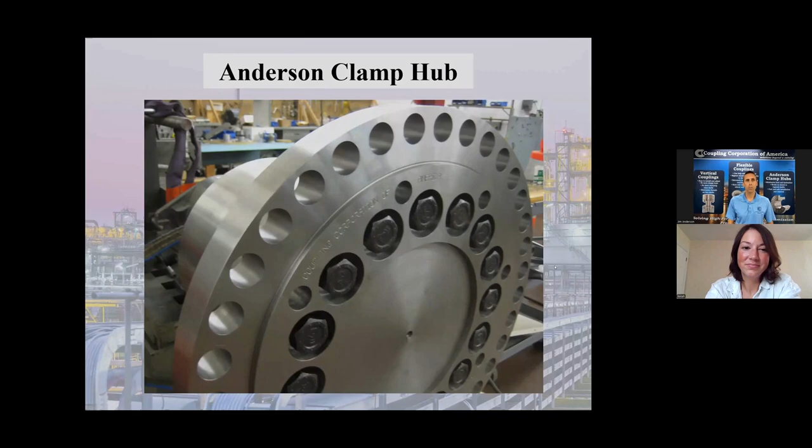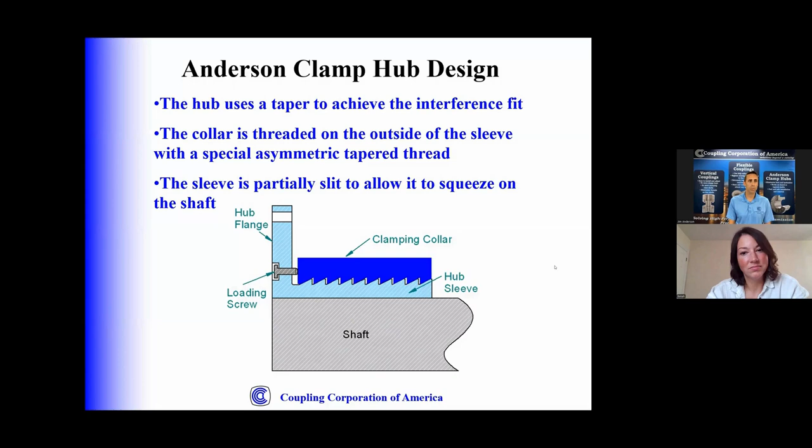And a lot of people love it because it's a mechanical shrink fit device that grips onto the shaft using friction. So this is a quick example, just a little diagram, and you can see there's a hub with a flange, and then there's a collar that screws onto it, and then a set of loading screws. As you tighten those loading screws, it pushes the collar. In this case, it pushes it to the right.

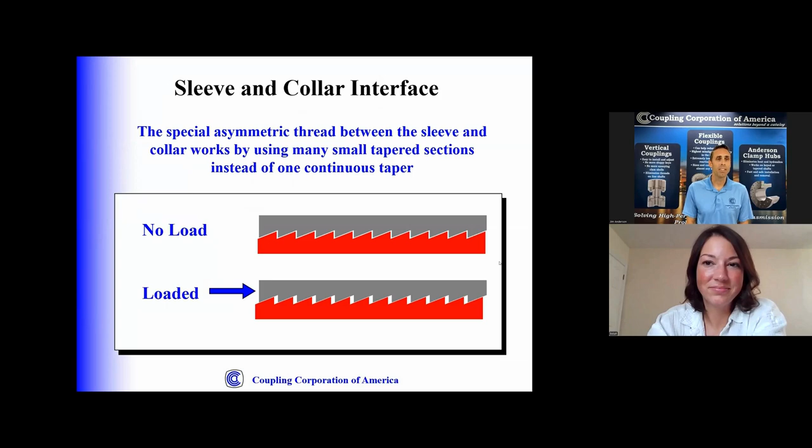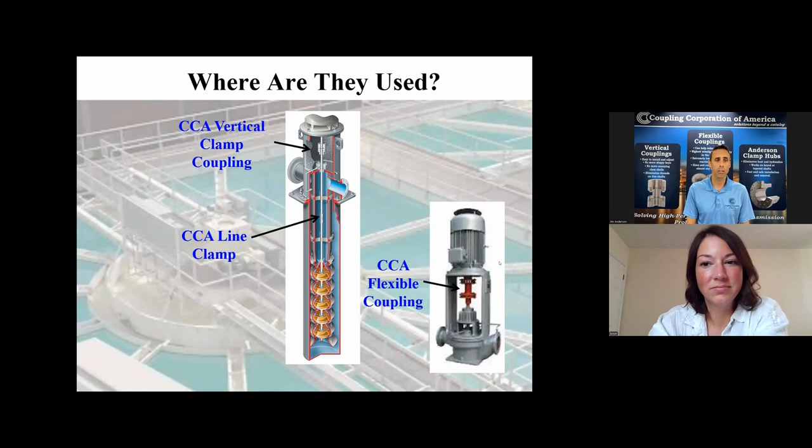We've got a product that works on line shafts. So if you have a deep well or some kind of long section type pump with stages of shafting, that would be the appropriate product there. And then we also still make flexible couplings that in some cases will be used on a vertical application, depending where the bearings are in the application. So today we'll talk mainly about the two rigid options, just how they work, how they fit in.

So this is the line clamp coupling, and as I mentioned, this all comes from our Anderson clamp hub technology, same type of technology, but it's been modified to use in this application. So what's really neat about it is it's designed to work on smooth shafts. So right now, a lot of people use threaded shafts. They'll have a shaft with a thread on one end, thread on the other end, and then they get threaded together with a threaded coupling.

And this allows you to get away from those threads. Just use a straight, smooth shaft, and the hub clamps onto both the top shaft and the bottom shaft. And this makes it a lot better for a couple different reasons, but it does make it a lot easier to make modifications in the field. It also works in both directions, which is great because a lot of times with threaded couplings, if you happen to spin the motor the wrong way in testing, you'll push it apart and end up breaking something in the system.

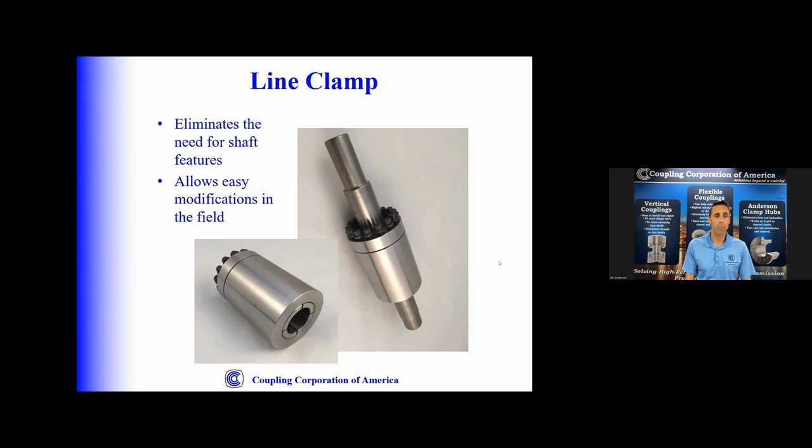But what happens is you squeeze the top shaft and the bottom shaft at the same time, and now you've got a nice rigid coupling. And this is designed to work usually in the water flow of the pump, so it's got to be a low diameter.

And the nice thing is when you look at a lot of applications where you submerge this pump shaft and you come back 2 years later, 4 years later, and try to get it apart, many people will tell you it's impossible to get my threaded stainless steel couplings apart. This helps to eliminate that problem by clamping onto the shafts. You're not getting all of the galling and the corrosion that would happen inside a thread.

So it releases much easier, and hopefully you can then save your shafts, use them again, not have to worry about replacing shafts all the time. And as I mentioned, it does it bidirectionally. So if you do happen to hook up the motor the wrong way, you're not just pushing the two ends apart and blowing out something at the top or the bottom of your system.

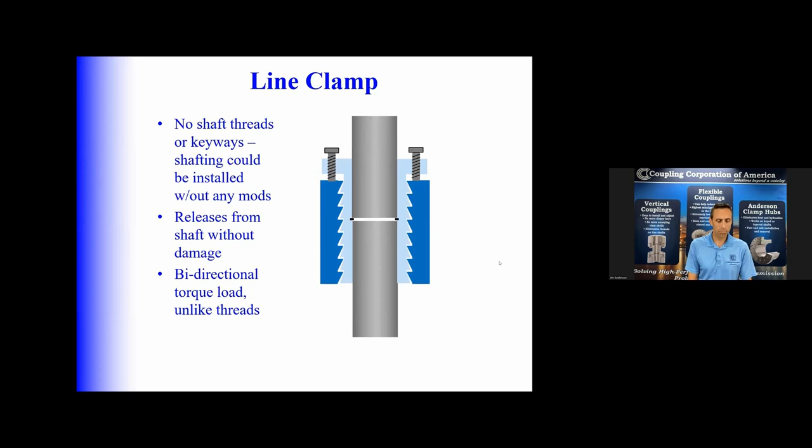So it's a neat product. This is all stainless in this case because it's underwater, submerged for years. In this case, we have a double-ended action. So we have loading screws at each end, and that just helps to provide a very large safety factor, just to make sure there are no problems.

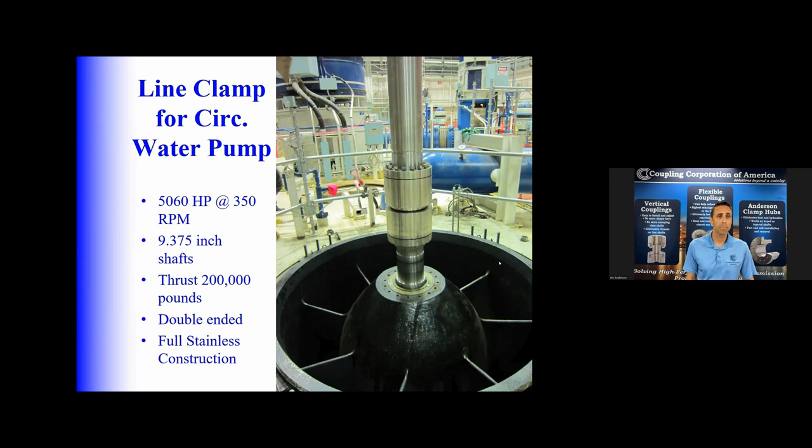Now I'll show a little bit more about our vertical clamp coupling. You remember from the beginning, this would be at the very top of that stack, between the motor and the pump. So normally this would be in a dry spot above the working part of the pump. It's a rigid coupling, so there's nothing flexing in the coupling, and it's designed to carry torque, and it's also designed to carry the thrust the pump would generate, or even just the weight of the pump rotor itself.

So we've got a couple things to note about it. There are no keyways needed anywhere. There are no slots. There are no threads. And all the components are piloted together. So you've got a really good connection from the top piece to the next piece to the bottom piece. Everything is piloted in a spigoted fit, so you always get good concentricity from top to bottom. And sometimes that's a real problem in some of the other products people use.

The other nice thing, it's got the ability to change your rotor lift. Many times in a pump, you need to be able to lift your pump rotor just enough to get the impeller off the bottom of the case. That's very easy to do with this product. And the other thing I'll show you at the very end, it's really neat, is that you're able to do some very fine tuning on the alignment, which is a really critical piece of the puzzle for a lot of people, because they don't have a good way to get their equipment into that final great alignment position.

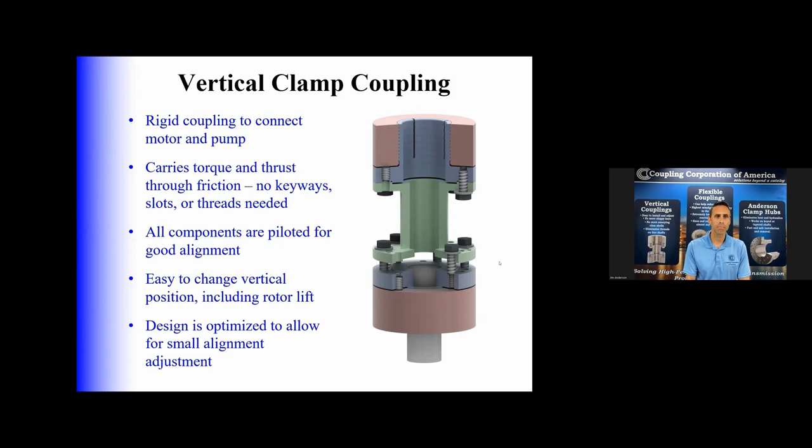So some things to think about in terms of the pump engineering end of it. If you're designing a pump or pump components from the start, there's some advantage to using this product, not just in a retrofit, but from the start of the design process. For one reason, on your pump shaft, now you don't need to use any threads or keys. So it really makes the manufacturing process easier on the pump shaft. You can just buy pump shaft quality shafting, cut it off to length, and you've got your finished shaft.

The other really nice thing is, if you're not going to be putting any keys or threads in it, you've eliminated all those stress concentrations. And once you eliminate some of those stress concentrations, you can actually use a smaller shaft.

Now, it may not be possible in every application, but just think, if you can go from a 1 3/4 inch shaft down to a 1 1/2 inch shaft, you've just saved a lot of money. You've also allowed yourself to now use a smaller seal, which is more beneficial. So it's a really nice set of features that kind of domino effect with each other.

The other really great thing is that when you start to eliminate some of those features, especially like a threaded section on the top of a pump shaft, you can start to make that pump shaft get a little shorter, which makes the motor on the pedestal sit a little bit lower. And the more you do that, the more you eliminate some of those reed critical frequency issues that you might have. Sometimes I know pump engineers are fighting against that all the time.

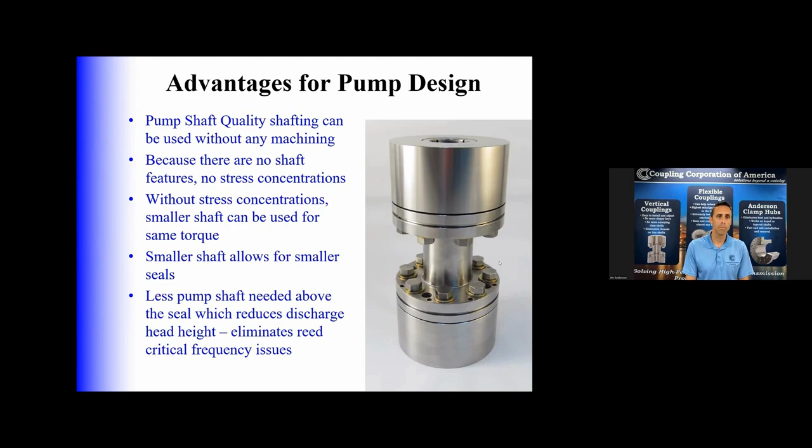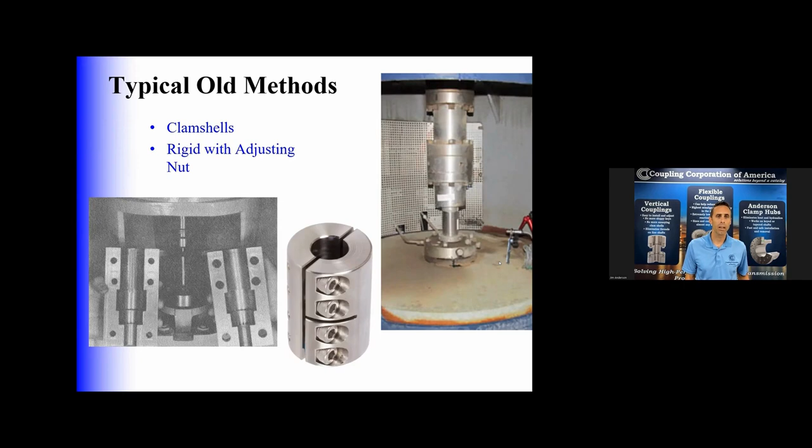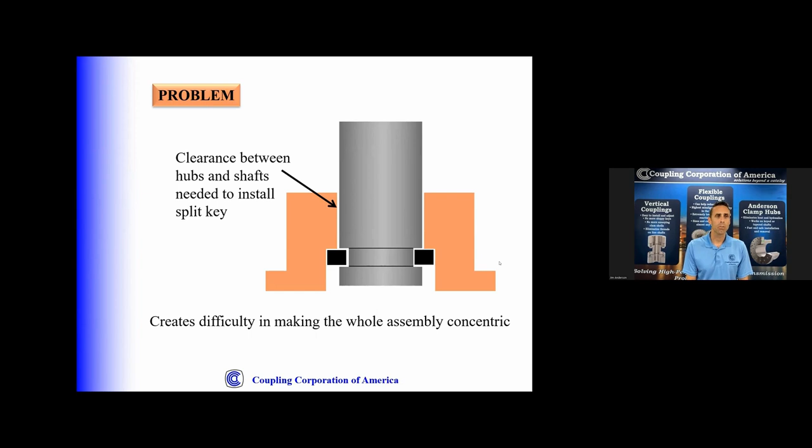So in the case of the normal rigid coupling, usually you have to have some kind of slip fit. It has to be able to slide onto the shaft and then slip up above on the motor shaft high enough to get a split ring key in. And that's the little black cross-section piece. So the problem there is you have to have clearance. You don't have a good fit on the shaft.

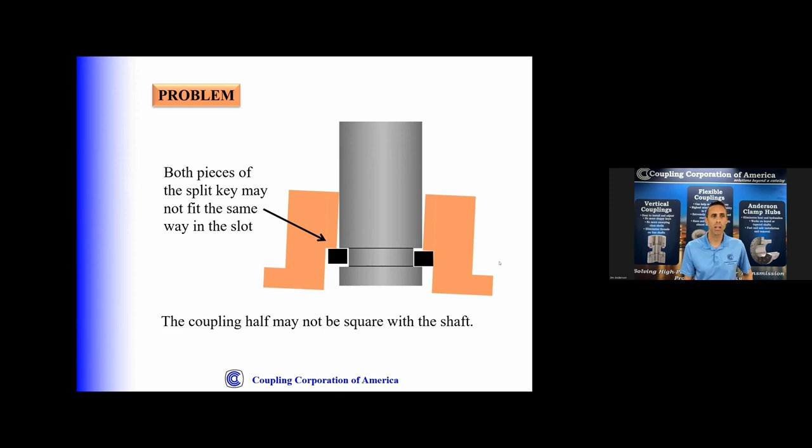So what ends up happening sometimes is, because of the way that hub sits on the key, on those split keys, your hub doesn't necessarily sit straight. Or it may sit straight, but you also have that gap that can be a spot to generate vibration. You don't have a solid fit with the motor shaft. Now, when you switch to the vertical clamp coupling, that all goes away, because you have interference on the shaft. You can still slip it on loose, but then it clamps in place, and now you've eliminated any of that wiggle room that you might have had before.

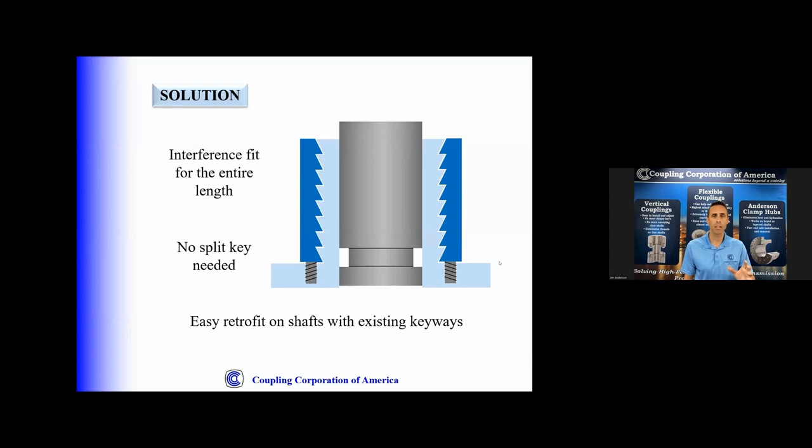When you go down and look at the pump shaft, a typical pump shaft might have a thread at the top of it, and that's where that adjusting nut sometimes comes into play. The pump hub itself is also loose. It's loose on the shaft, and it's only carrying torque via a keyway. So you have the same problem where you have a pump shaft and a pump hub that really aren't connected rigidly. So there's room for wiggle and vibration.

And usually the only thing that's locating anything to the pump shaft is that adjusting nut, using the threads on the pump shaft. And I think if you ask a lot of people in the pump industry, are those pump threads cut perfectly? Usually not. They do a good job holding the load, but they're not necessarily machined in a perfect way that really centers the coupling well. So you have that little bit of error that you're throwing into your system all the time.

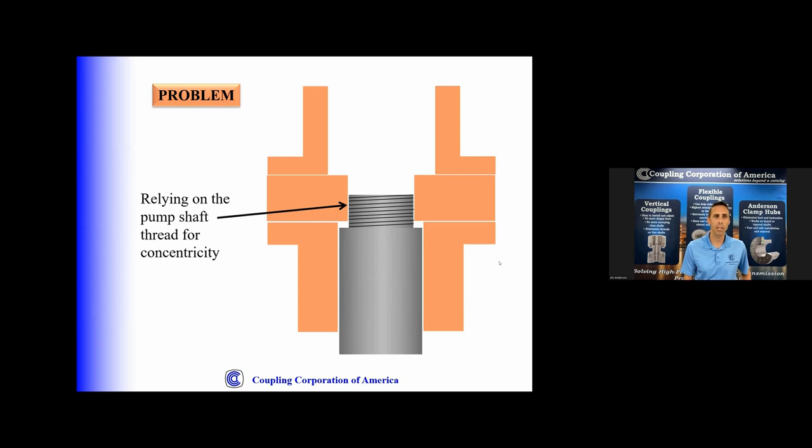So what's great on our product, again, we slip onto the pump shaft, but then it just clamps in place. And now you have a nice tight fit. And if the threads are there, you can see in this diagram, we work right around the threads. And if we need to, sometimes we can put a threaded piece on just to fill up space if that's needed.

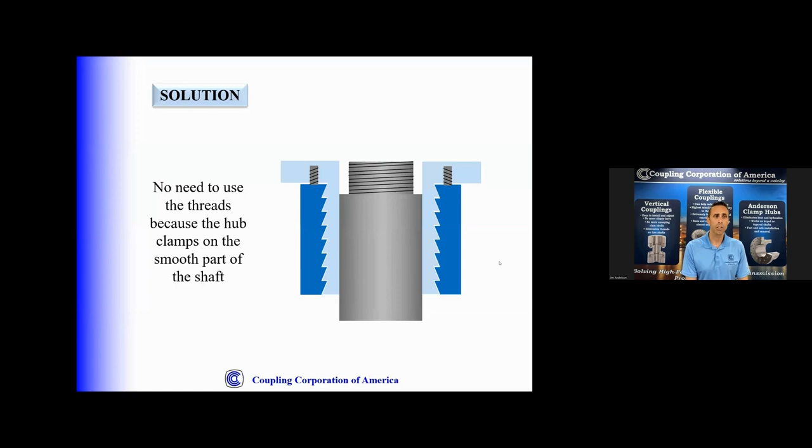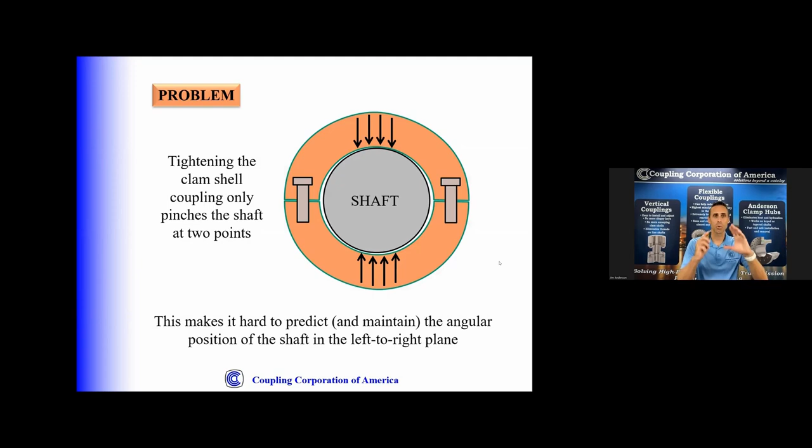And if anyone's used these clamshells before, they'll tell you the first time you use it, it fits pretty well. Once you take it out of service and put it back in the second time and the third time, they tend to start getting warped. Things start to twist a little bit. They don't have the perfect curvature that they once did, and the fit gets worse and worse. So at that point, it's just dumb luck how your motor and pump shaft are going to

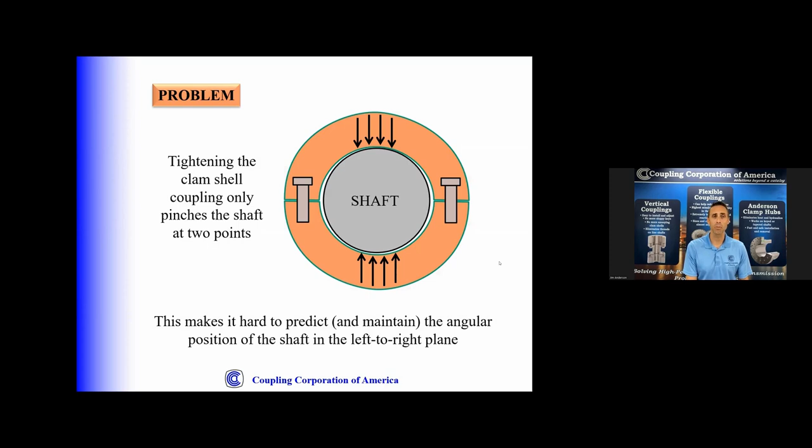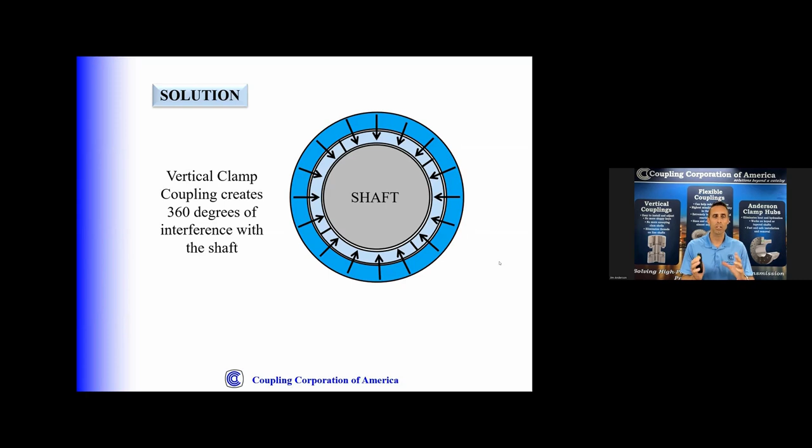align themselves. So what happens is when we switch to our product, now you have a great fit, 360 degrees around the shaft. Everything is tight. You have no wiggle room. There's no direction that's uncovered. So it's a much better solution.

So next, I wanted to show you, how does this work? When you go install this coupling, how does it look? What happens? There are different ways to do it. We have some customers that like to do it a different way or a different order of operations, and that's fine. Whatever works for you is great. Here's what we recommend though. First, you start by putting the pump hub in place. So you would drop it into place, and then you can tighten it in whatever spot makes the most sense.

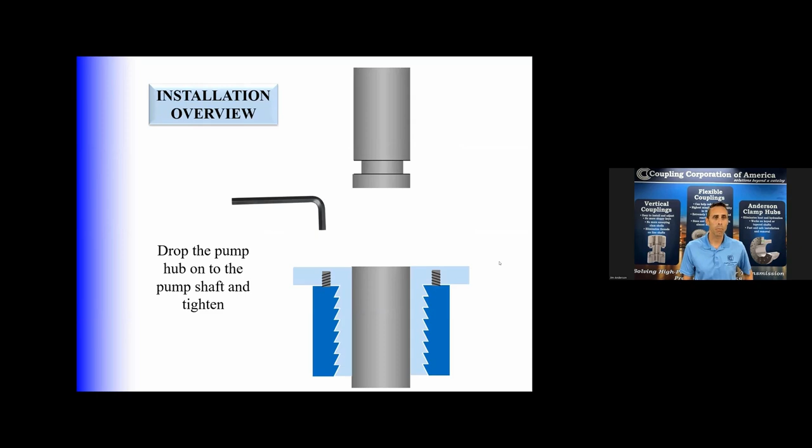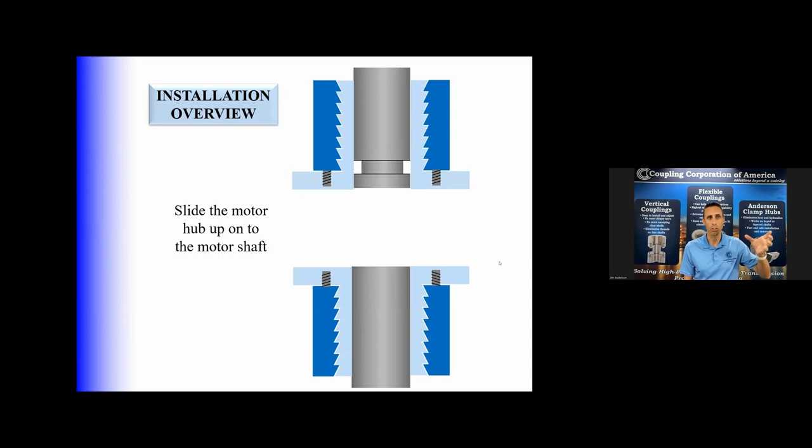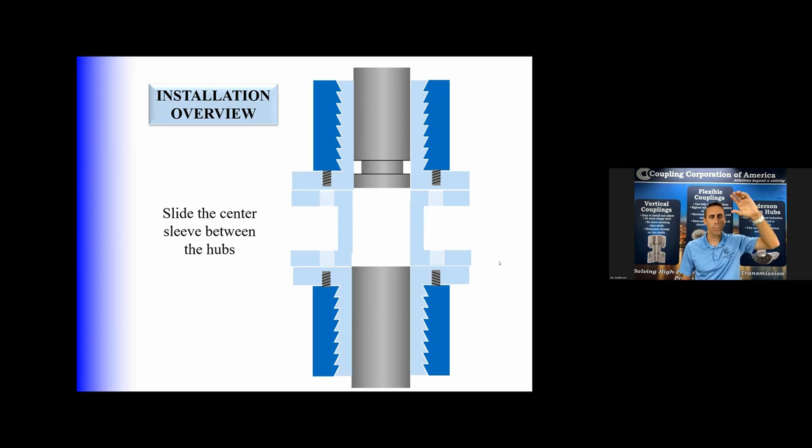Then you take the motor hub and you would slip it onto the motor shaft and slide it up and keep it loose. So you're just holding it there. Essentially, you can hold it with your hand, slide it up, hold it in place until you slip the center spacer in between. So now you put that center spacer, now you have a little bit of a stack. Everything is sitting on the pump hub. It's at the bottom, then you have this spacer sitting there, and then the motor hub is resting on top loose.

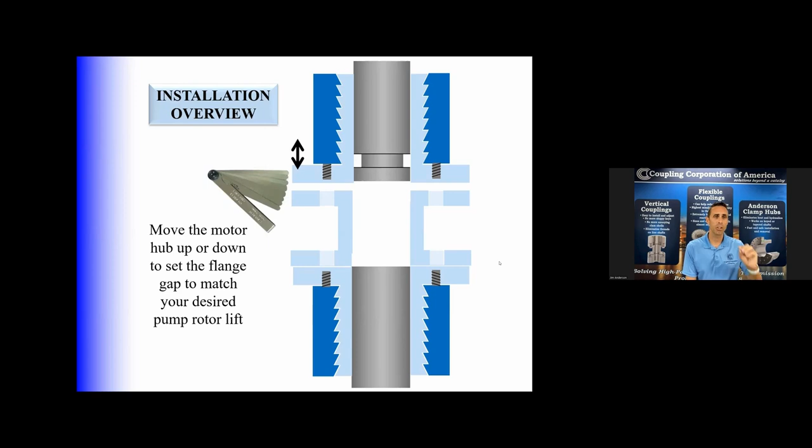At that point, you decide how much lift you want on your pump. So maybe it's only 10 thousandths, maybe it's a 1/4 inch, maybe it's somewhere in between. You can put a shim, use a feeler gauge or any other kind of shim between the motor hub and the spacer. So now you have created that gap that you want to lift your pump. Once you've done that, now you can go ahead, reach in and tighten the motor hub in place. So you go through the tightening process.

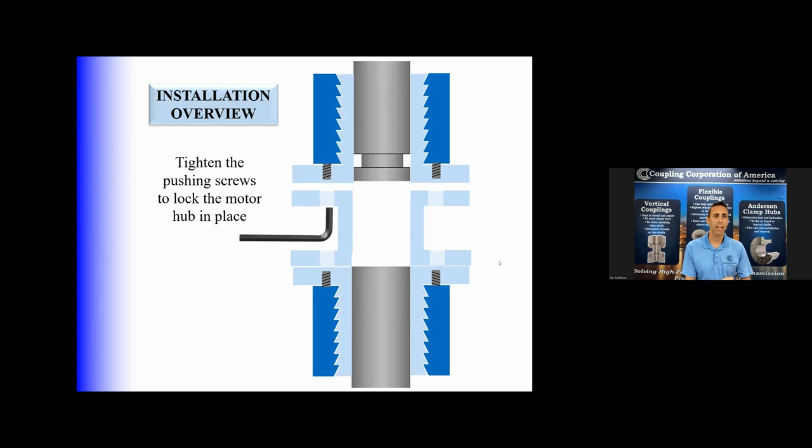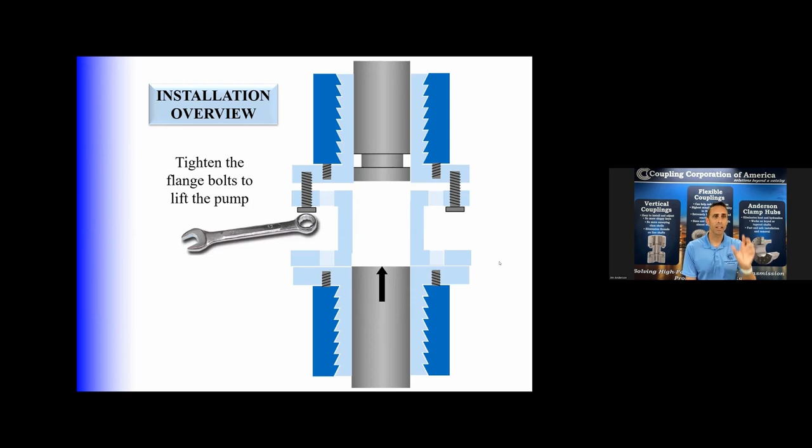And once you have that tightening process done, the motor hub is fixed, the pump hub is fixed, and now you're going to do the final step of putting in the flange bolts. And as you do that, you'll start to just see those two flanges come together. And what you're doing is lifting the coupling and the pump. So now the whole pump rotor has lifted itself into the final running position that you wanted it.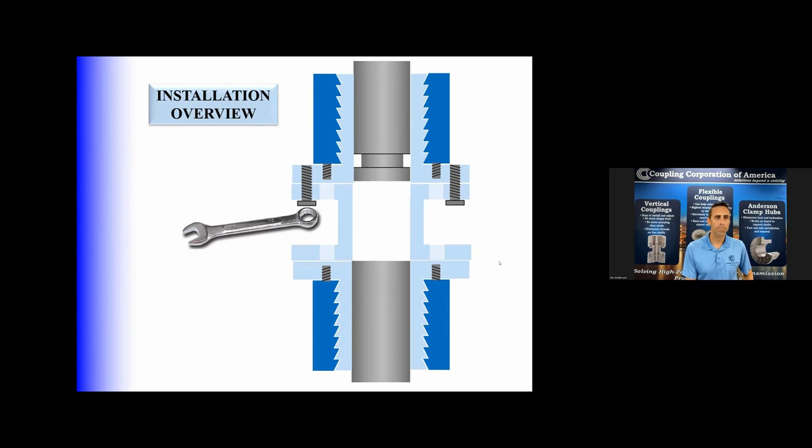And if you ever need to adjust it, it's no big deal. You loosen the motor hub, move it to a different spot. Maybe you want to shim it differently. And now you're ready to go. So at this point, we've got the couplings in place, ready to run. But this is where it really gets good. This is where you want to look at how can I align this piece of equipment perfectly using the coupling.

So what we recommend is, again, all the components we have are piloted, so they have great concentricity. They're balanced like that. So you have a nice product in place. What this final step will do is give you some very, very minor corrections to make sure everything top to bottom is really perfectly aligned. It takes any of the wiggle room or slop out of the system.

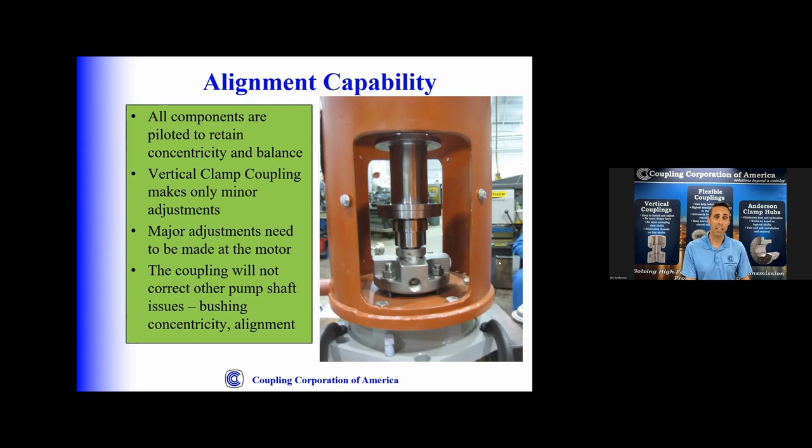You know, in reality, you still need to align your motor to your pump. That should be done before you put the coupling in. And I think most people still do that. So we don't want anyone to think that just by using this coupling, you can eliminate your normal alignment process. You can't, but this will help get it really perfect at the end.

So what happens is this diagram is very exaggerated, obviously, but in reality you might have a situation like this where there's a little bit of pitch in the motor, maybe in the pump. There's a little bit of a misalignment. And when you look at the run out on the pump shaft, hopefully you can get an indicator somewhere down near the seal. You might see 5 thousandths, 10 thousandths, 15 thousandths even.

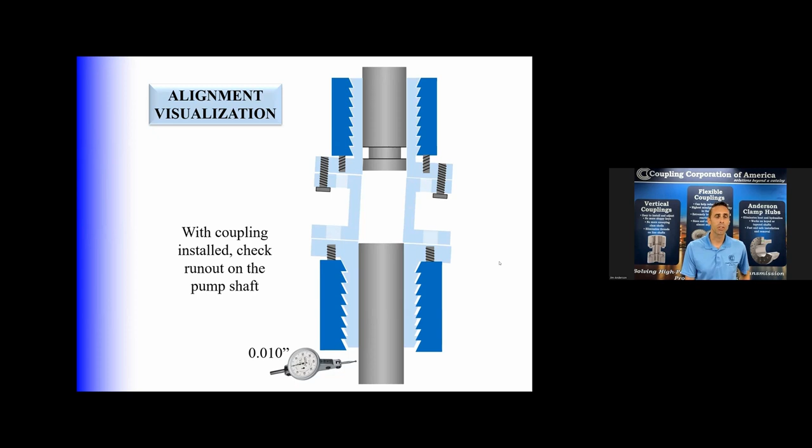And with normal couplings that you might use now, people live with that. They have pretty high runouts on the pump shaft, and there just isn't a good way to get it out. They might try adjusting things differently, but in reality it's really just a bit of luck to see if you get the run out of your system. So in this case, though, you can take a good measurement, have that indicator on, and then you start tweaking those loading screws a little bit.

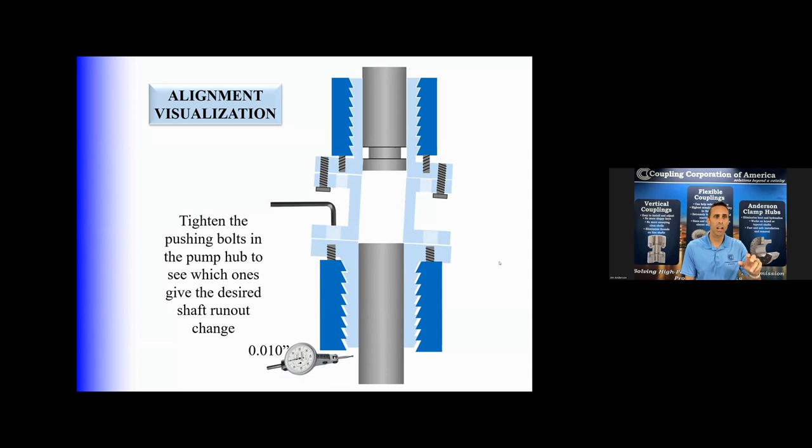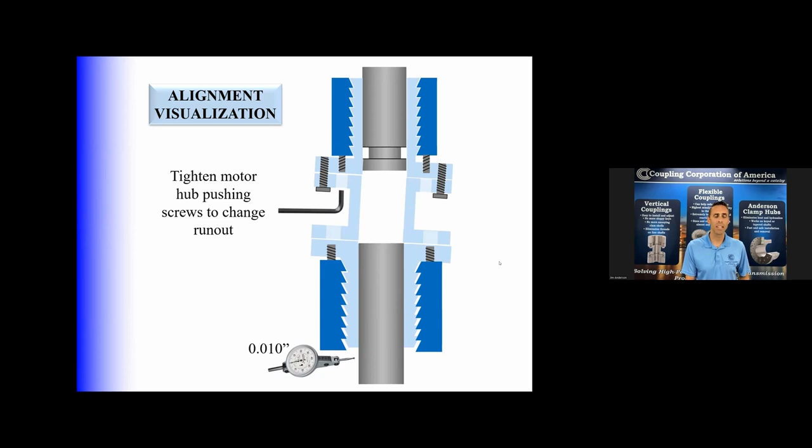So as you say, you start with the pump shaft or the pump hub, you can just start to tighten each of those, just maybe a little bit on one side, and you'll immediately see which way things move on that indicator. You can do the same thing on the motor side, make some very fine adjustments on one side or the other, and you'll see the pattern. Maybe if you tighten the ones on the left side, you'll get a certain movement. If you tighten the ones on the right, you'll get a different movement. And once you see that, it becomes very easy to start dialing in, go back and forth a couple times, and pretty soon you'll end up with a perfect run out.

And this has been the case with a lot of our customers. They've said, wow, this is amazing. We used to spend a whole shift trying to align top to bottom once we have a clamshell in. Now we can do it in 5 minutes. Put the coupling in, just spin it, make a couple adjustments, keep looking at the indicator, and when we've got it, we're done.

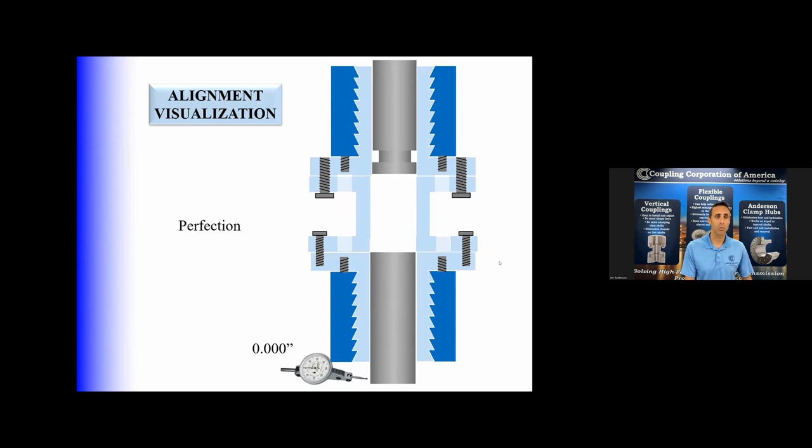So it really saves a lot of time in the field, especially, picture yourself in an outage. You want to get this pump back up and running as fast as you can. This helps you do that, and not only is it back in service, but it's back in service better than it was before, because now the run out is great. Your seals are in a great position now, having very little run out going through them.